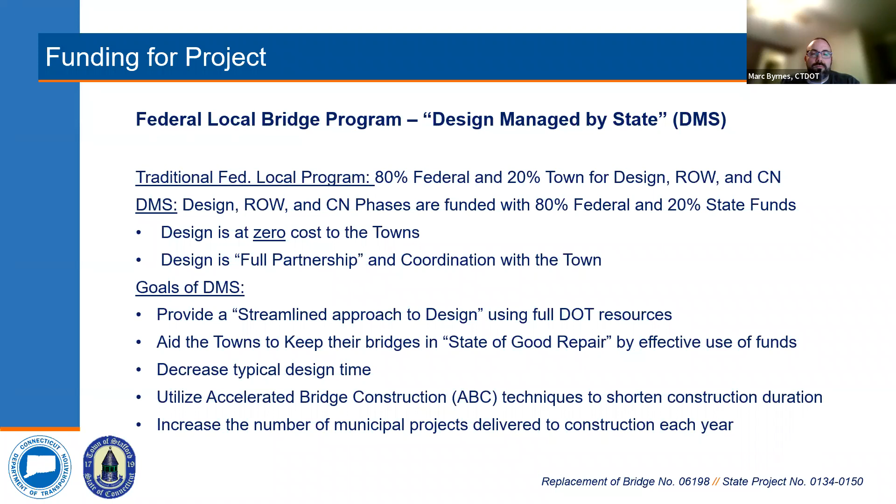We'll now turn it over to the first selectman from the town of Stafford to make some remarks.

Thanks, Marc. My name is Sal Titus. I'm the first selectman here in Stafford. I'd like to thank everyone for participating in tonight's public information meeting for the Whispering Pines Bridge. I'd like to thank the folks at CHA companies and Connecticut DOT for their hard work designing and administering this bridge replacement project, as well as our staff in the Department of Public Works for continuing to work on improving our aging infrastructure. Please ensure that you communicate any questions or concerns regarding this project to us. This is your opportunity to get your questions answered. There will be contact information for Connecticut DOT provided at the end of the presentation. They will forward your questions to the appropriate parties during the comment period. At this time, I'll turn the presentation back over to Marc from Connecticut DOT.

Thank you, Sal. I'll now introduce the rest of the project team. To the left-hand side of the screen is Bart Sweeney, our manager, otherwise known as Division Chief of the Bridge Unit. Next to him is Derek Lassard, our Principal Engineer. As I said, my name is Marc Byrnes. To my right is James Barrows, Project Engineer. Also with us is Zach Garano from the Office of Rights of Way. And then from our consultant liaison engineering firm, Clough Harbour Associates, is Anand Seshadri, project manager, and Rob Bahler, project engineer.

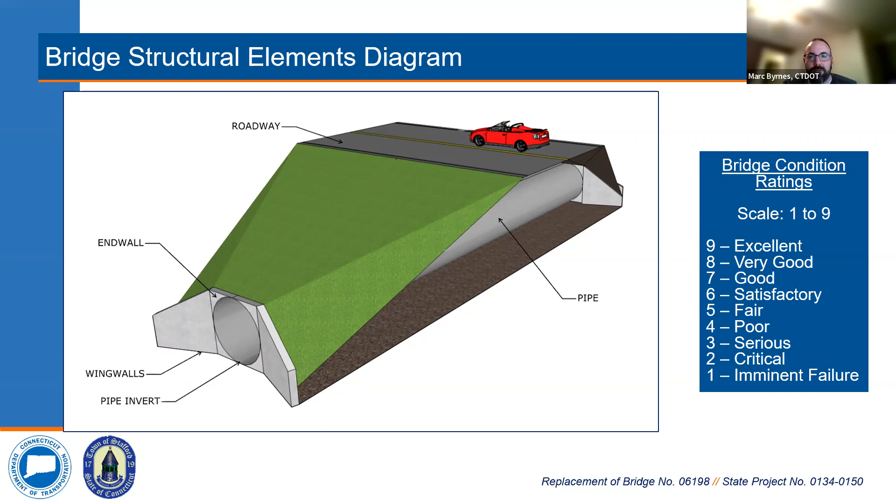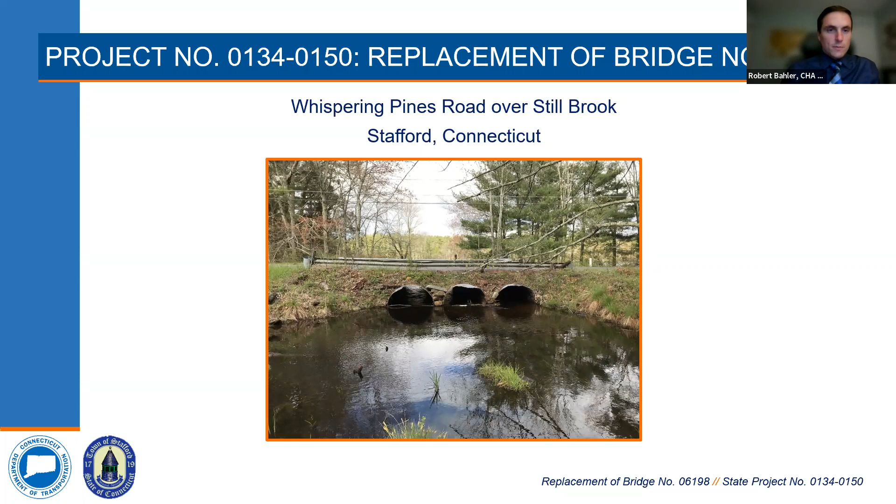We are the consultant liaison engineer for the project. As Mark mentioned, this is for project 134-150 in the town of Stafford. Here you can see on this project location map, bridge 6198 right in the center of the screen. This is the subject bridge for the project.

Through this area of the project, Whispering Pines Road runs north to south. Still Brook runs underneath the bridge from the east to the west and drains into State Line Pond, which is just to the west of the bridge.

The bridge is located approximately 250 feet to the north of Stony Lane, which is just to the south of the bridge. And on the north side of the bridge, there's a couple other roadways, Maple Road, Hemlock Road. There's about 35 residences to the north of the bridge, all of which are accessed through Whispering Pines Road only. There is no other access road to those properties north of the bridge.

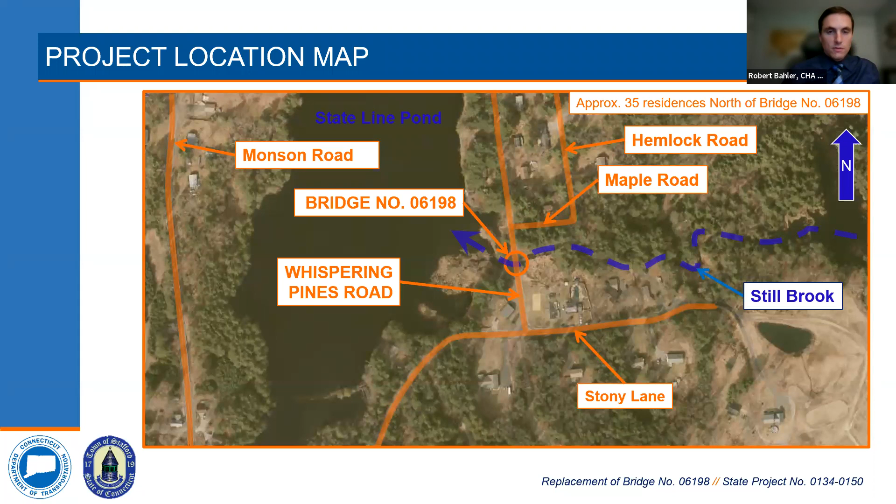Next slide. Looking at some existing information on the current bridge that's there now. In this plan, you can see north is pointing to the right, so the roadway is aligned horizontally on the page here. The stream runs from east to west, so from the bottom of the page to the top of the page.

The existing roadway is 24 feet in width, and that consists of 2 travel lanes, 1 in each direction, northbound and southbound. And along the roadway on both sides of the bridge is a metal beam rail supported by wood posts.

Traveling this roadway on a daily basis is approximately 220 vehicles per day. The posted speed limit on the roadway is 20 miles an hour. Based on some traffic studies we did, the 85th percentile speed is 24 miles per hour. And this roadway, Whispering Pines Road, is classified as an urban local road.

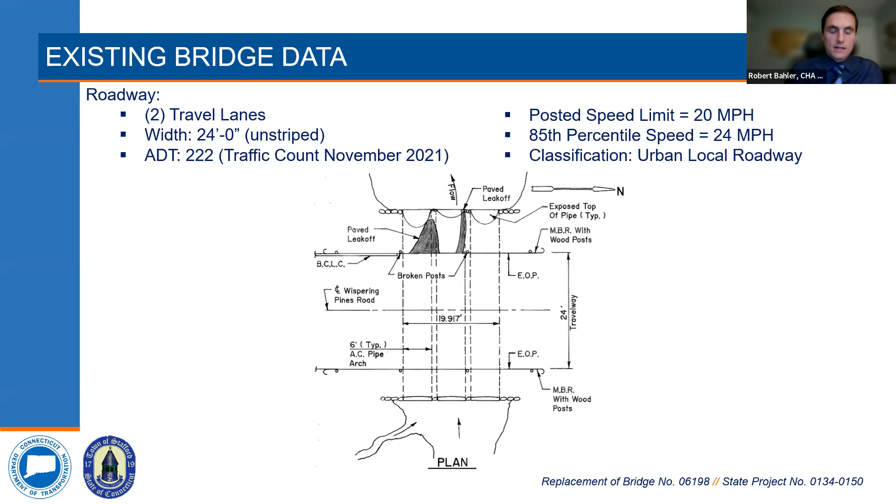Next slide. A little more existing information on the bridge. It was constructed in 1975, so it makes the bridge about 47 years old.

Looking at the elevation view on the bottom left of the screen, you can see the bridge consists of 3 pipe culverts. Each of those are approximately 6 feet wide and 4 feet tall. So that results in a total structure length of about 20 feet. These pipes are asphalt coated corrugated metal pipe arches.

And on top of those is 2 feet of fill, and then the roadway's on top of that. As you can see in the cross section view on the lower right, the pipes themselves are about 40 feet in length. And as I mentioned before, the roadway width is 24 feet.

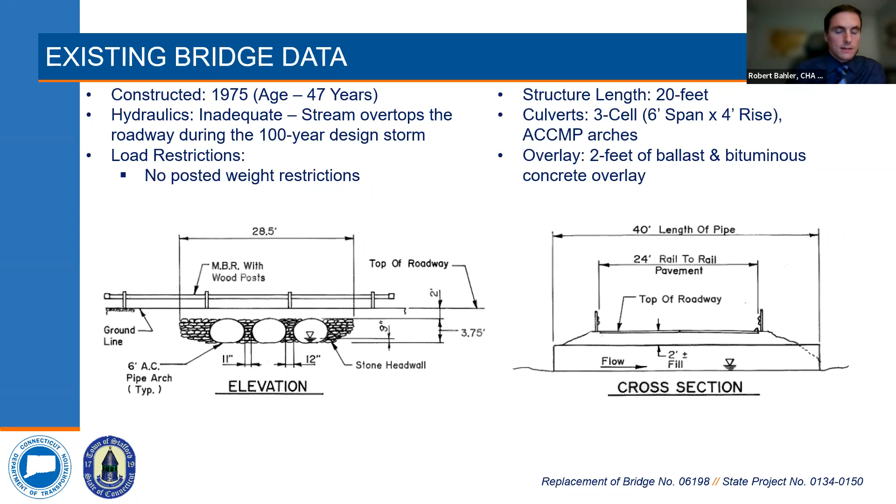Looking at hydraulics, the existing hydraulics for this bridge are inadequate. The stream overtops the roadway during the 100-year design storm. And this bridge is currently not posted for any weight restrictions at this time. Next slide.

Looking at the existing condition ratings of the bridge, as Mark described to us previously, bridges are rated on a condition scale from 1 to 9, with 9 being the best. For this bridge, the overlay is rated in good condition, that's a 7. The railing is rated in poor condition at a 4.

So the bridge rail does not meet current safety standards. The channel and channel protection of Still Brook is in satisfactory condition, and the culvert is rated in serious condition. And these condition ratings are all based on a DOT inspection report from September of 2021.

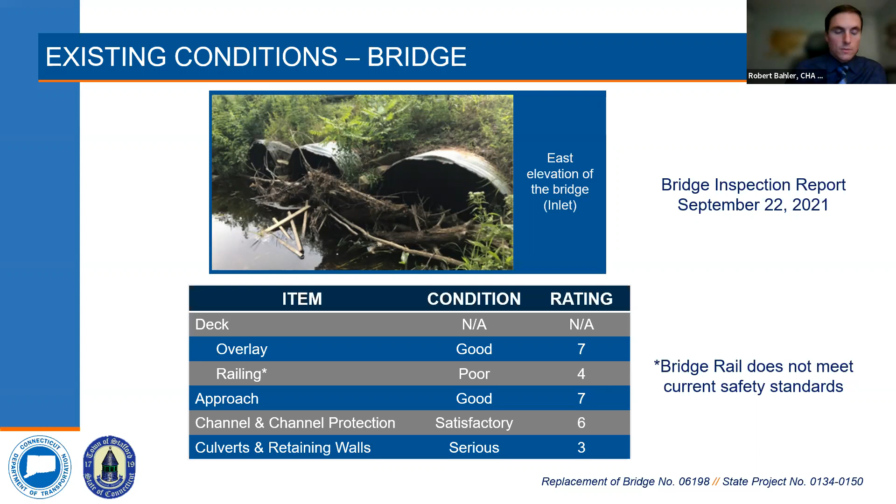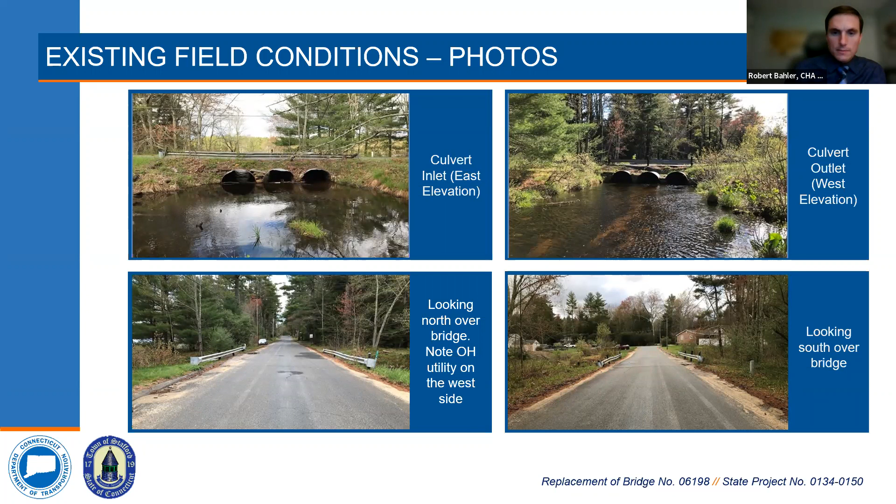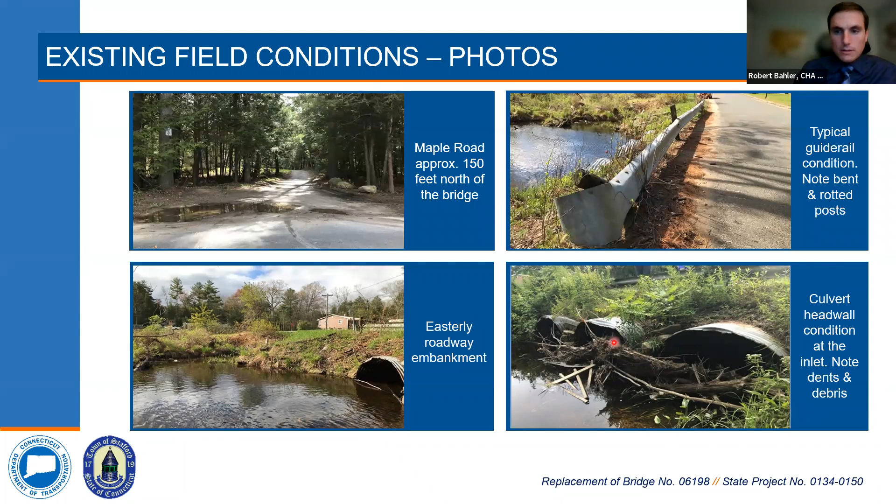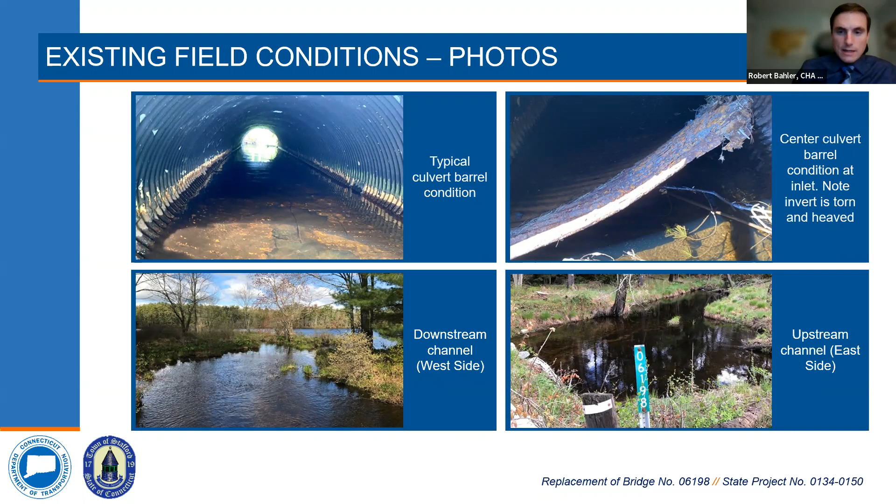Photo to the lower left and lower right are pictures of the downstream and upstream channel respectively—the west and east side. As you can see in the lower left photo, there's a state line pond in the background, and again significant wetlands throughout this area. Photo on the lower right is looking upstream there.

So taking a look at the project's purpose and need—as I mentioned before, the bridge was constructed in 1975, so it's 47 years old, and it's starting to show its age.

Again, as I mentioned, the culvert is rated in serious condition due to the extensive section loss and perforations in the culvert pipes. The approach rail system doesn't meet safety standards, and from a hydraulic standpoint it's inadequate—the stream overtops the roadway during the 100-year design storm.

So as part of this project, we're proposing a full bridge replacement. I also want to note that despite all the deficiencies we've noted with the existing bridge, it is currently safe for the traveling public. It's inspected on a regular basis by Connecticut DOT, so at this point it is currently safe for traversing.

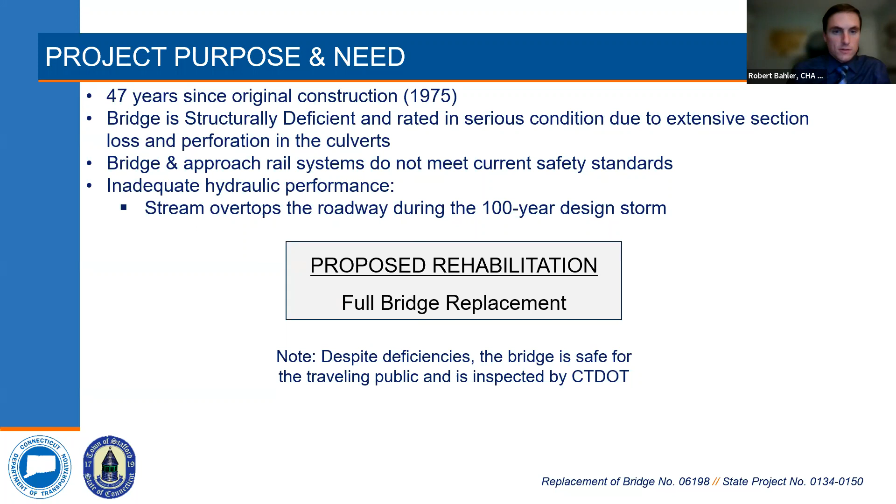Some improvements we'd like to make as part of the project: a full bridge replacement with a 75-year service life and a bridge that requires minimal maintenance for the town. We'd like to maintain the existing roadway width of 24 feet. Along both sides we'd propose an open bridge rail system that meets crash standards, and we'd like to improve hydraulic performance to mitigate roadway overtopping.

Also, to the north of the bridge, Whispering Pines Road is the only access to those residences, so we need to maintain that access during construction—that's one of our goals. We'd also like to minimize impacts to those properties. We recognize construction is going to cause some impacts, so we'd like to minimize that as much as we can and replace the bridge quickly.

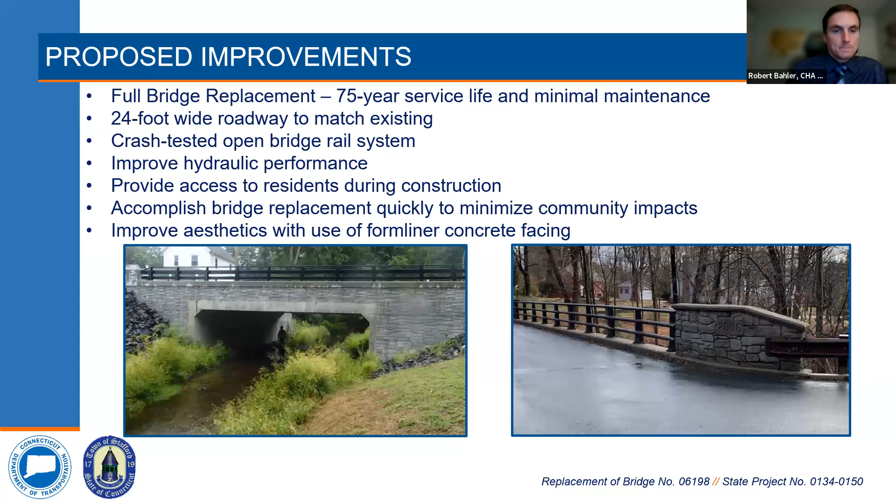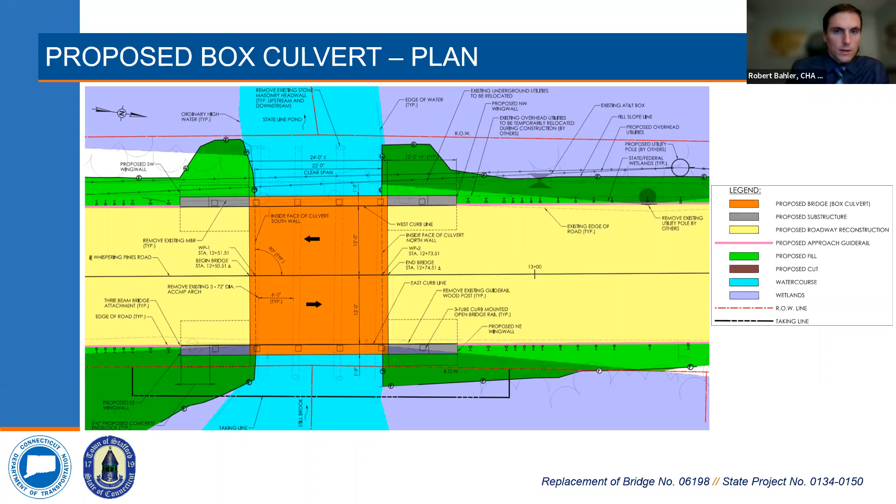The bridge will be constructed on spread footings. One of our goals was to improve hydraulic performance, so the proposed bridge will be able to pass the 100-year storm without overtopping the roadway. Next slide.

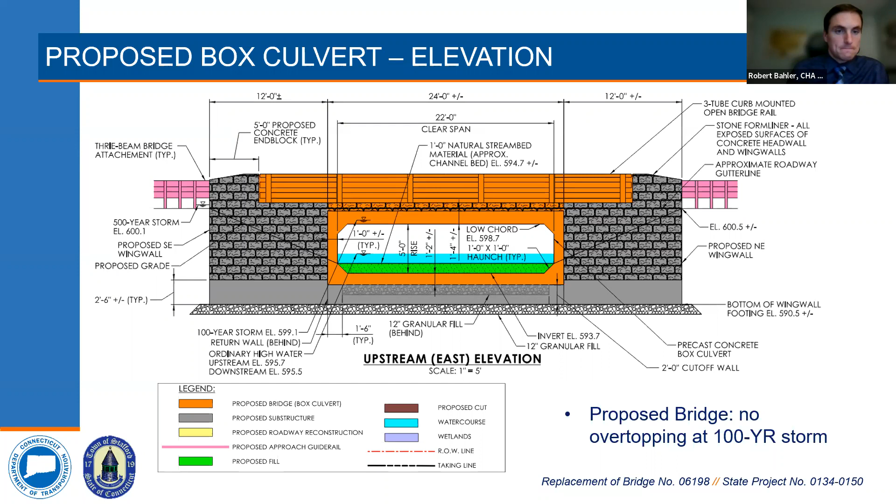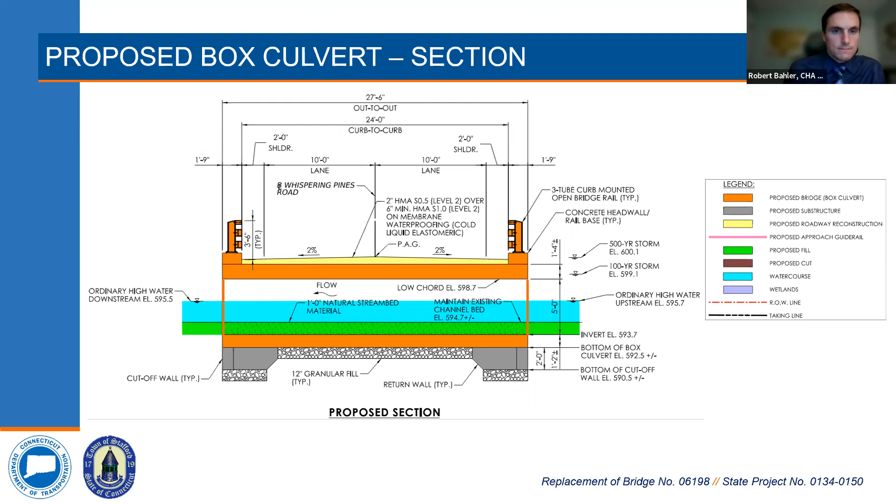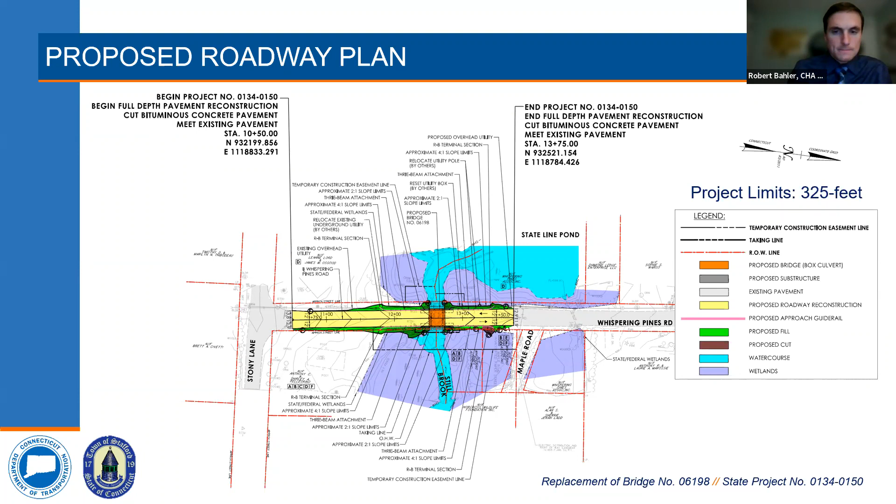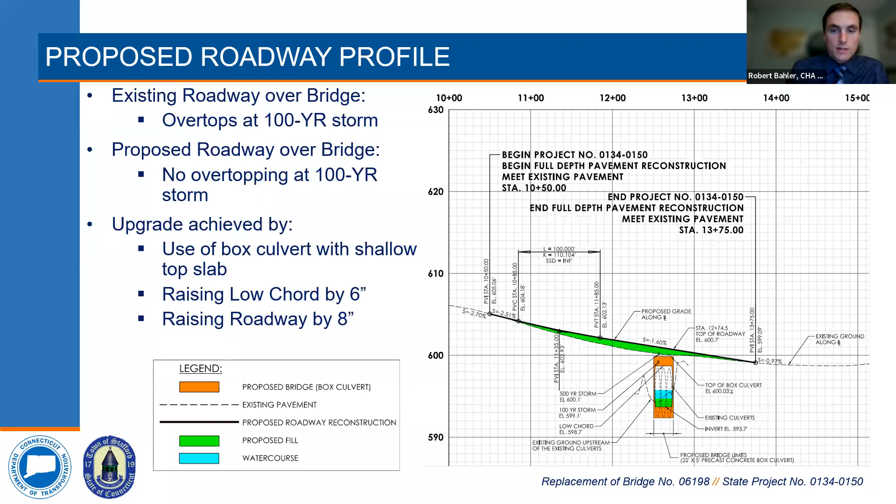As mentioned before, the existing roadway is overtopped by the stream during the 100-year storm. In order to mitigate that, we're proposing the box culvert with a shallow top slab, and also raising the low chord of the bridge by about 6 inches and the roadway by about 8 inches. That'll help pass the 100-year storm without overtopping the road. Next slide.

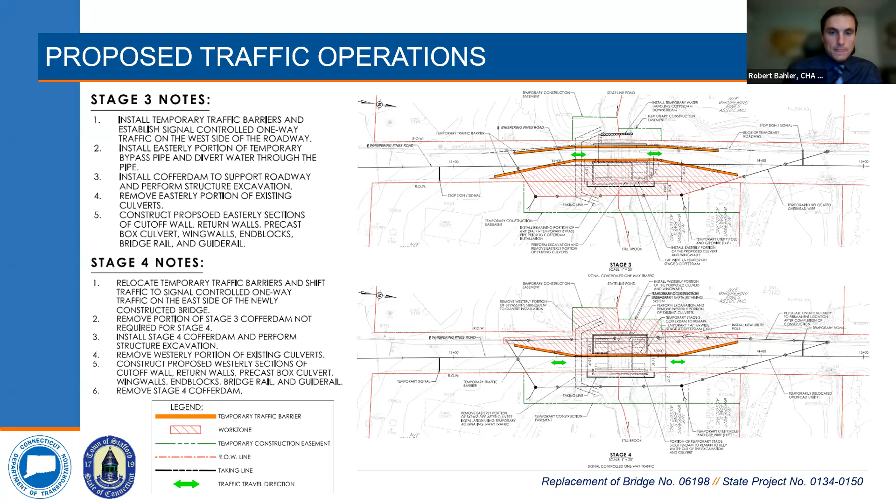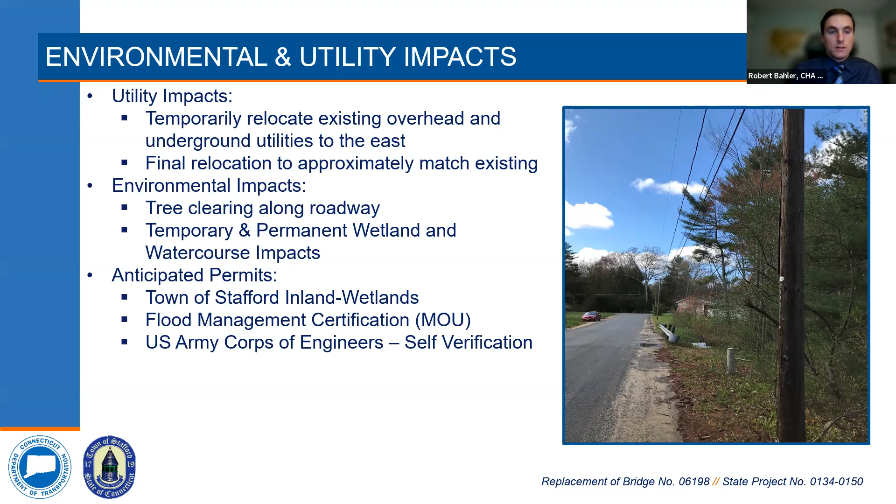As far as environmental impacts, we expect tree clearing along both sides of the roadway to facilitate construction. There will also be temporary and permanent wetland and watercourse impacts as part of the bridge replacement. At this time, we're anticipating a Town of Stafford inland wetland permit, a flood management certification, and a U.S. Army Corps self-verification permit.

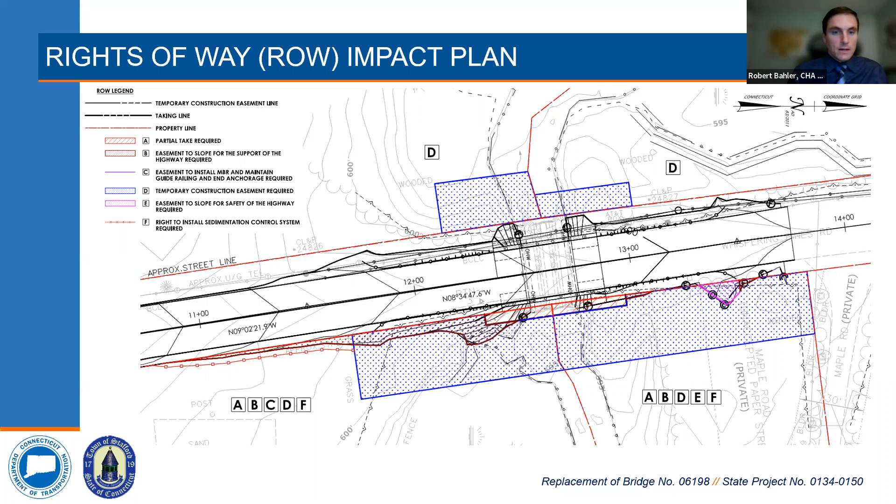At this point, I'm going to turn it over to Zach with DOT Rights of Way, and he's going to walk us through the acquisition process. So Zach, thank you, Rob, it's all yours.

Thanks, my internet just about cut out.

So like Rob said, my name is Zachary Guarino. I'm the project coordinator of the department's Division of Rights of Way. Our office is responsible for acquiring the property rights needed for transportation projects. The proposed project design requires acquisition of property rights, like Rob mentioned, so I'd like to give a brief overview of the department's right-of-way acquisition process. Please keep in mind that the specific impacts are still being finalized and may change as the design progresses. Any required property rights will be acquired in accordance with Connecticut General Statutes sections 13A73 and 13A98E. When there is federal money used in any aspect of a project, the department must adhere to the Uniform Act.

Once the design has progressed to a point where we are ready to begin the acquisition process, each affected property owner will receive a formal letter of intent to acquire from our office, along with a property map which depicts the exact property rights to be acquired.

At that point, our office will determine the fair market value of those property rights and use that value to establish an offer of just compensation. That offer will be sent to the property owner in writing, and a right-of-way agent from our office will be available to meet with the property owner, explain the project, go over the specific impact to their property, and explain the state's offer. The property owner will have a reasonable amount of time, typically 30 days, to consider the state's offer and enter into negotiations.

When an agreement is reached, the department will prepare all the necessary paperwork to record the deed and property map on the town land records. However, if an agreement cannot be reached, in order to keep on schedule, the department may acquire the necessary property rights through its power of eminent domain.

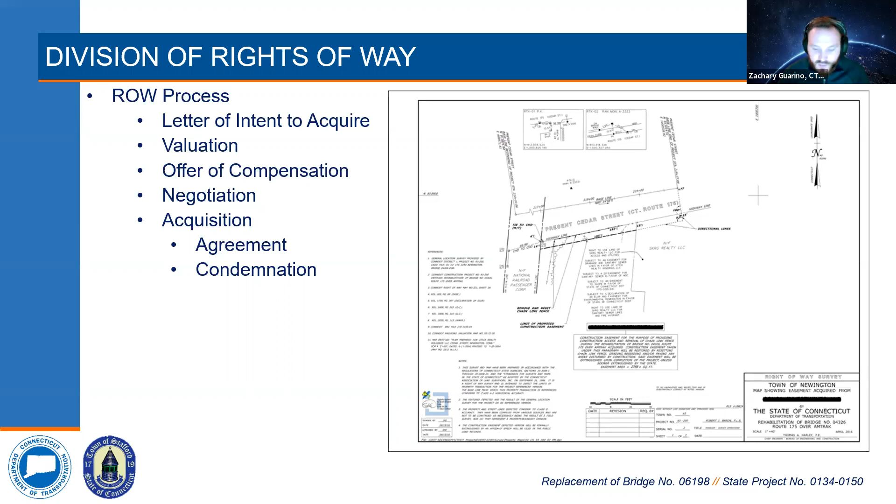As Mark mentioned early on in the presentation, as part of the DMS program, 80% of the cost will be covered by federal funds, and the remaining cost will be covered by the state. So there'll be no cost to the town as part of this bridge replacement project. Just to note also, the cost and schedule are preliminary at this point, and they're subject to change. As Mark said, the plans are only developed to a 30% completion, so there is some potential for some change.